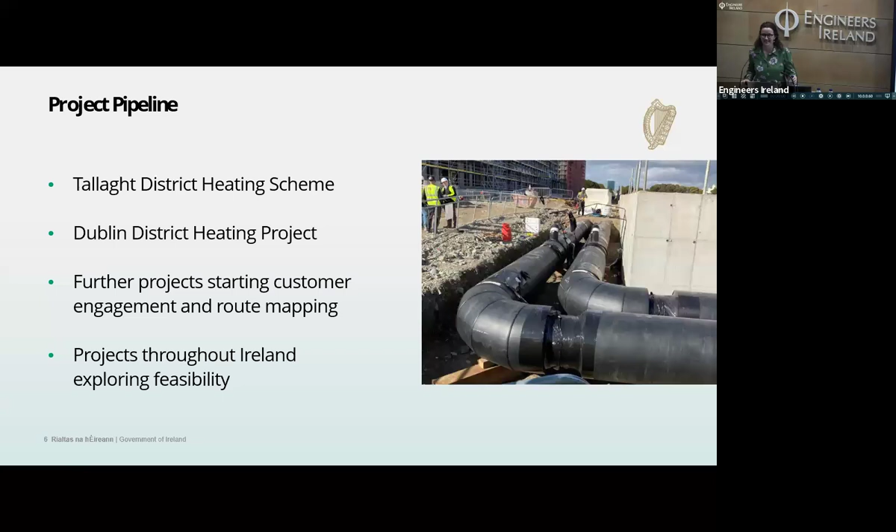Okay, so I'm going to just cover a bit of, first of all, who SEAI is. I'll present some high-level figures on heat stats and data and insights that we have from our Energy in Ireland report. I'll also give an overview of district heating and the Centre of Excellence, as well as a project case study. So for those of you who aren't familiar, SEAI is the Sustainable Energy Authority of Ireland.

Our mission there is to be at the core of delivering Ireland's energy revolution. And we do this really by providing insights to policymakers and programme designers through research and demonstration, technology expertise, statistics and modelling, consumer behaviour and policy advisory, and we feed that insight into the design of our supports to accelerate action in home and business decarbonisation, but also community activation and public sector leadership. And then we feed the insights and the evaluation back into our policies. So it's quite circular.

Every year we publish the Energy in Ireland report, and it's a very comprehensive assessment of where we're using energy in Ireland. So the data in the 2024 report analysed the 2023 data. So I'm going to present a bit of information from the heat section on this, just to give you an idea where we're at really with heat.

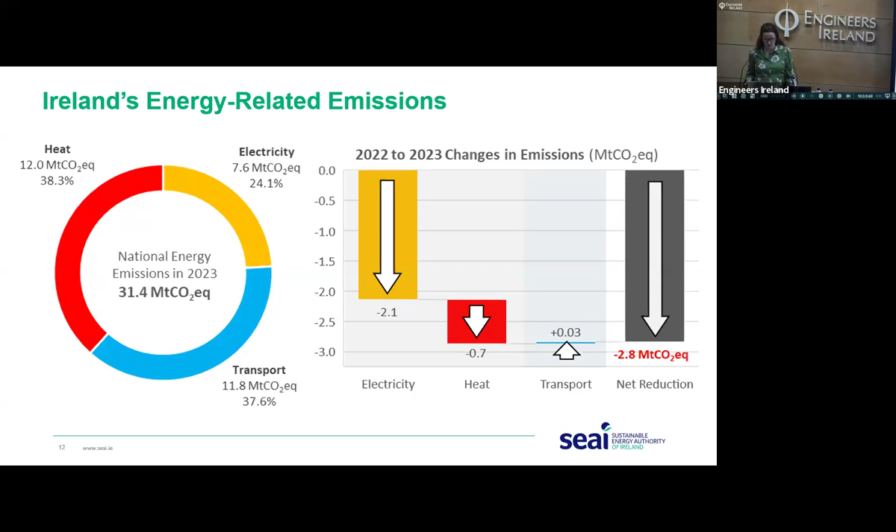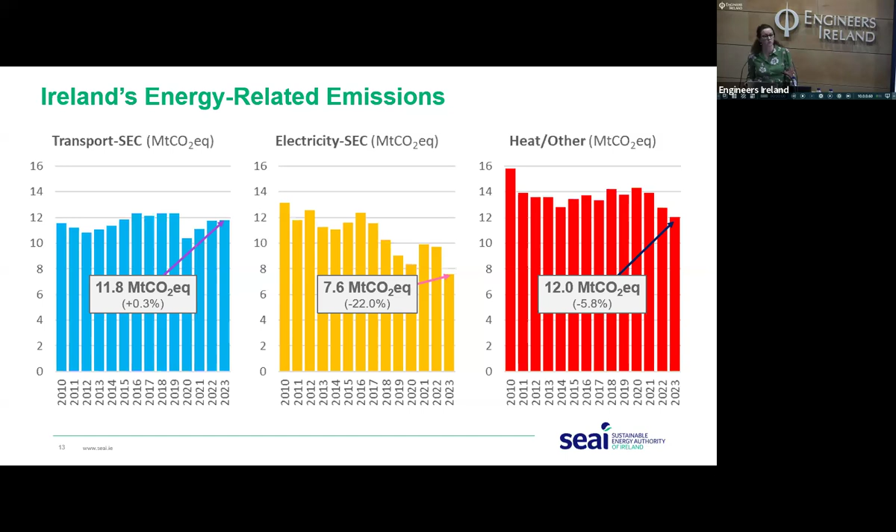There's likely to be a few moving parts on this. It could be to do with higher energy costs, but also slightly warmer winters over the last few years, and there's a whole host of other things that could impact on that. I suppose the key message though is that we're just not coming down fast enough.

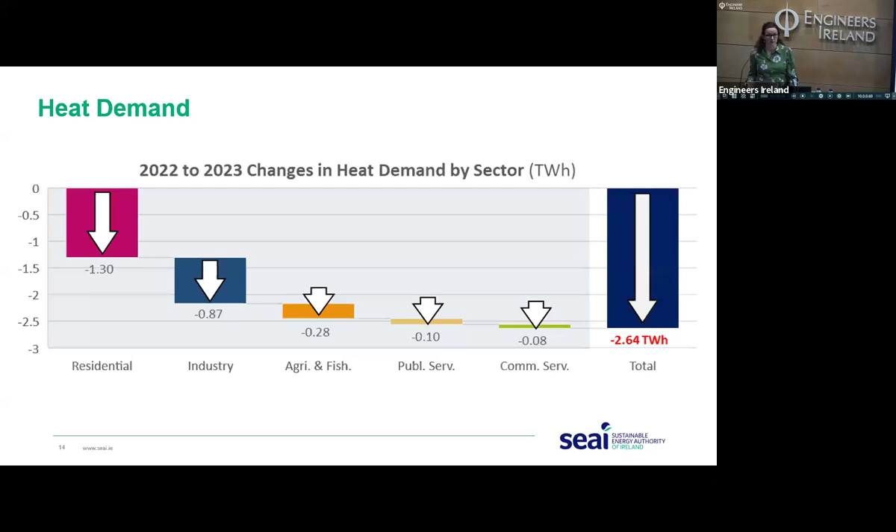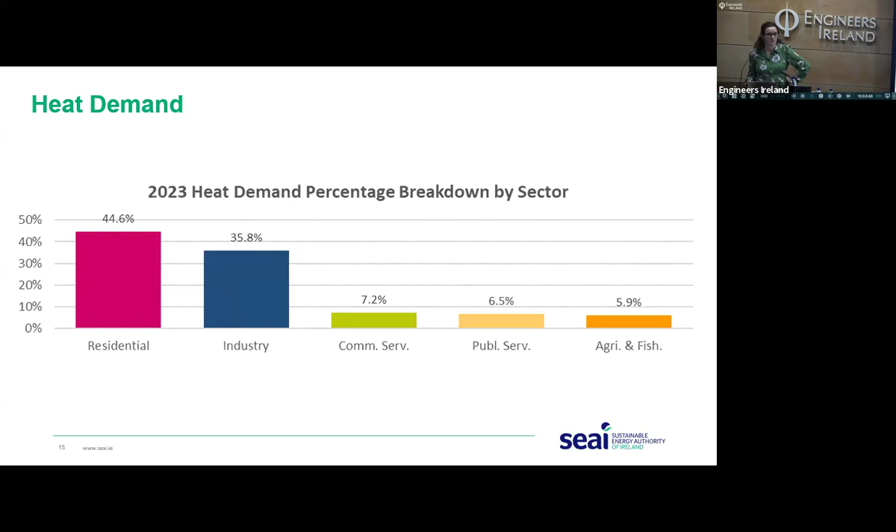This presents the heat demand by sector, where the big reductions were, and you can see residential and industry came down fairly significantly. But across all sectors of society, our heat demand was reduced. Looking at the sectoral breakdown, the residential sector accounted for nearly 45%, and combined residential and industry was just over 80%. Those other three sectors are pretty minimal in comparison.

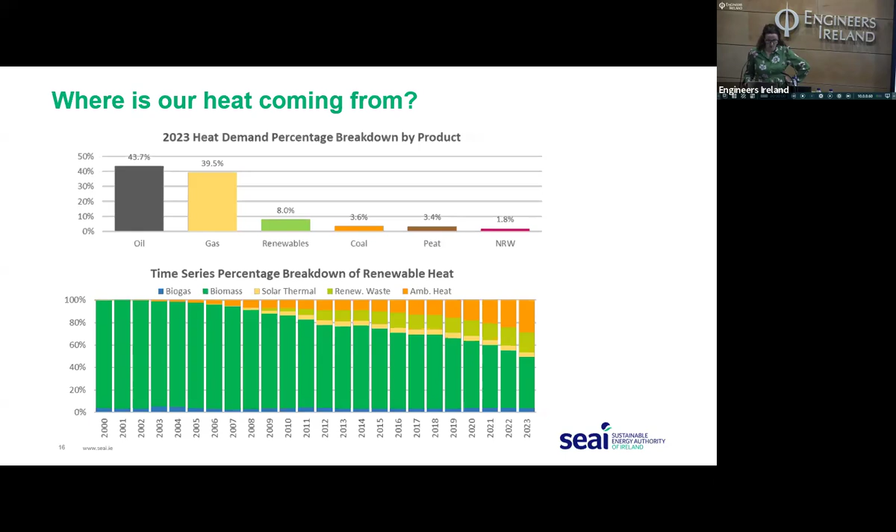But over the last 10 years in particular, we have started to add other more diverse sources of renewable heat to the sector. So particularly there, ambient heat has been increasing, and that's really just from the installation of heat pumps, but also biogas, solar thermal and renewable waste have been added as well.

So where do we stand versus the EU? Well, in the context of the European Union, we currently have the lowest share of renewable energy sources in heat compared to the EU average of 26%. So under RED III, the Renewable Energy Directive, which Seán mentioned, we're going to have to increase that. There's mandated percentages. I think it's 0.8% for 2021 to 2025 and 1.1% increase for the next 5 years. So we're looking at about 15.8% by 2030. So there's an awful lot of work to do to get where we need to be.

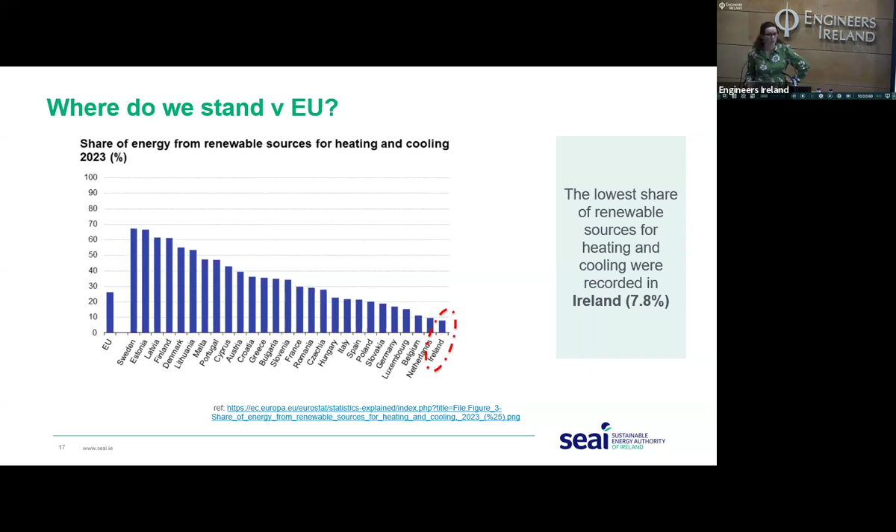In Ireland, it's very low; it's less than 1%. But if you look at the likes of Denmark, it's over 60%. And in some of those leading countries, Sweden, Latvia, and Estonia, it's very, very high as well. So again, a lot of work to do for us to catch up with even the EU average on this.

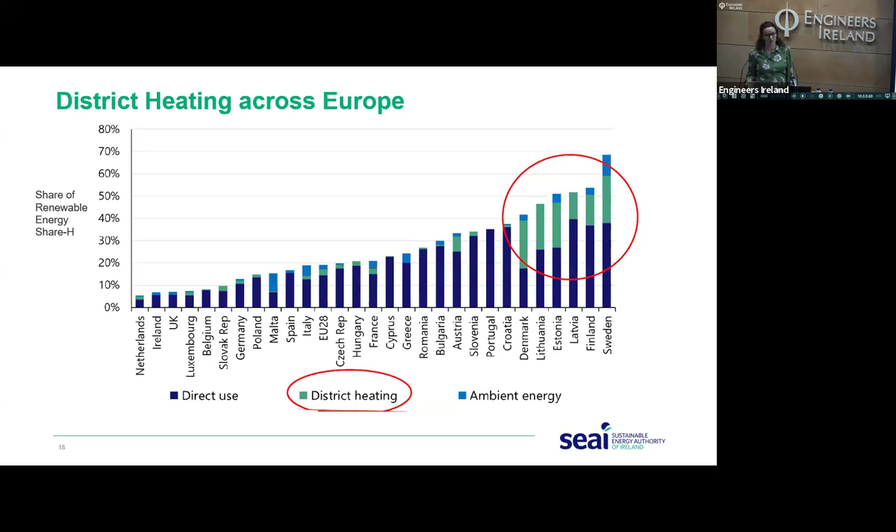So what is district heating? Some of you might know this already, but I think it's worth illustrating. Really what district heating or district cooling means is the distribution of thermal energy in the form of steam, hot water, or chilled liquids from a central source of production through a network to multiple dwellings, buildings, or sites for the use of space or process heating or cooling.

So you take that waste heat to your energy centre, and you can boost that with a heat pump. You can have alternative sources of energy, for example, biomass boilers or electric boilers, and then you distribute that out throughout your heat users. And typically you would have some large anchor heat users, for example, public buildings, but also residential, industry, commercial, that kind of thing.

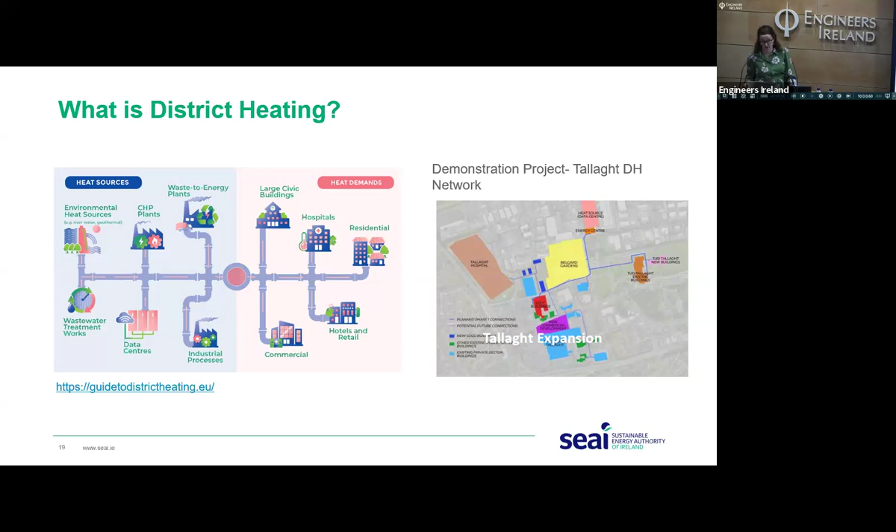So why would you go with district heating anyway? Well, cutting carbon emissions to align with your net zero goals is a priority for Ireland. We have the low carbon bill, and you can do that with district heating because it's a renewable source of heating. It's technology agnostic, and the energy centre can be future proofed. You can switch out future technologies in time.

It supports a future low carbon electricity grid via heat storage and demand diversity. There's also improved air quality and maintenance costs for customers. So each customer doesn't necessarily need a boiler or a heat pump in their homes. They have a heat interface unit, so it significantly reduces maintenance costs for them.

It's a potentially new market, so there is an employment creation opportunity there. Obviously, there's significant challenges with the amount of infrastructure that needs to be built in Ireland, but these are opportunities that we can grasp, really. There's also reduced dependency on fossil fuels and increased security of supply because you're utilising renewables, and also health and safety benefits, for example, removing gas from someone's house. And then finally, there's the potential for low cost of renewable or waste heat where that's reused.

So Seán again mentioned the National Heat Study. I won't go into too much detail here. It is available on our website. There's 8 reports if you have a couple of weeks to read through it. It's very interesting. But it did analyse different decarbonisation pathways towards net zero by 2050. And every scenario presented included district heating as a significant, I suppose, support to the decarbonisation of our heat sector.

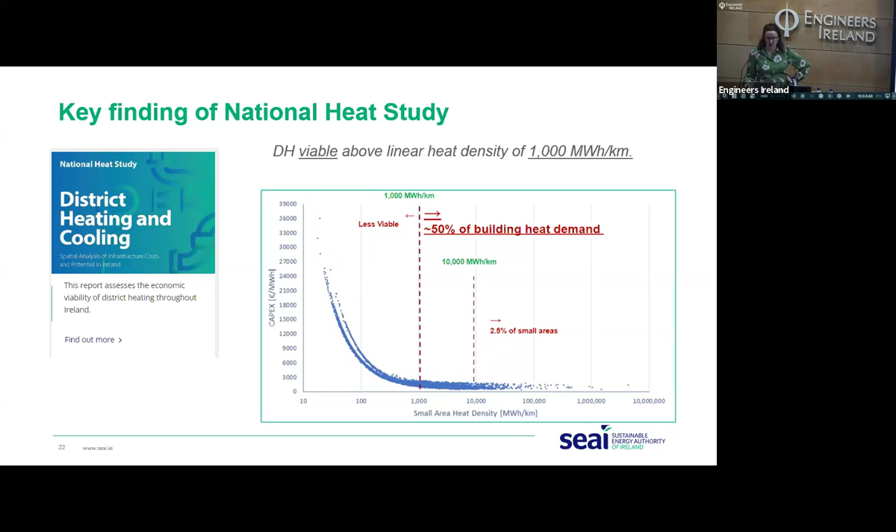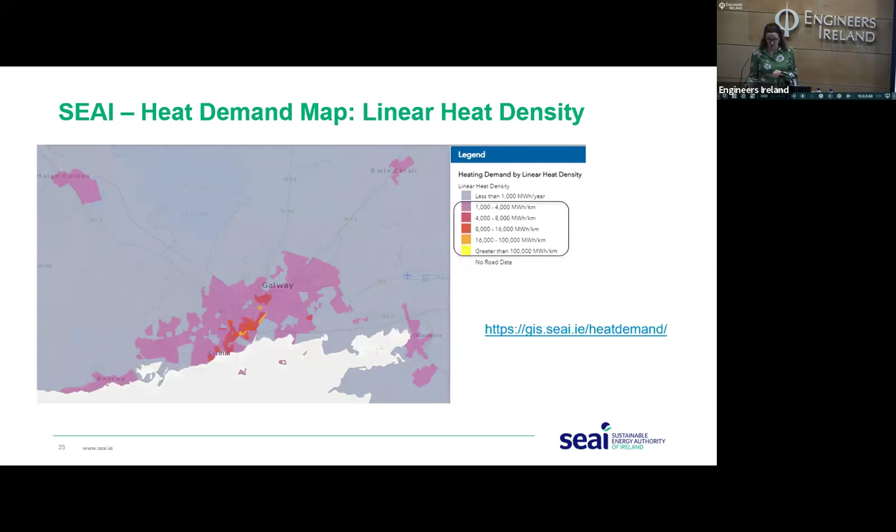So as part of the National Heat Study, we developed a heat demand map. It's available there on our website. The link is there. And it's based on the characteristics of the buildings of each individual area, and includes all the buildings in these areas, including public, commercial, residential, and highlights then where the hotspots are in terms of that density of above 1,000 megawatt hours per kilometre.

We also carried out some further analysis and modelled the towns and cities with the highest potential for developing district heating networks. So this is also on our website, and using a spatial model, clusters of census small areas with high heat demand densities were amalgamated into distinct candidate areas for district heating. So you'll see on this map where the higher the heat demand, it's more yellow, and the lower then it's kind of purpley colour.

And so here are two proposals, say for this area in Waterford City. Based on the knowledge of the heat demand and a desktop analysis, you can identify the big anchor tenants there that you could have with the hospital and university, and then run your pipes into the other more densely populated areas. So there's a few options there, and we use that data to assist with similar planning all around the country, so local authorities can access this to identify areas that could be potentially viable for district heating.

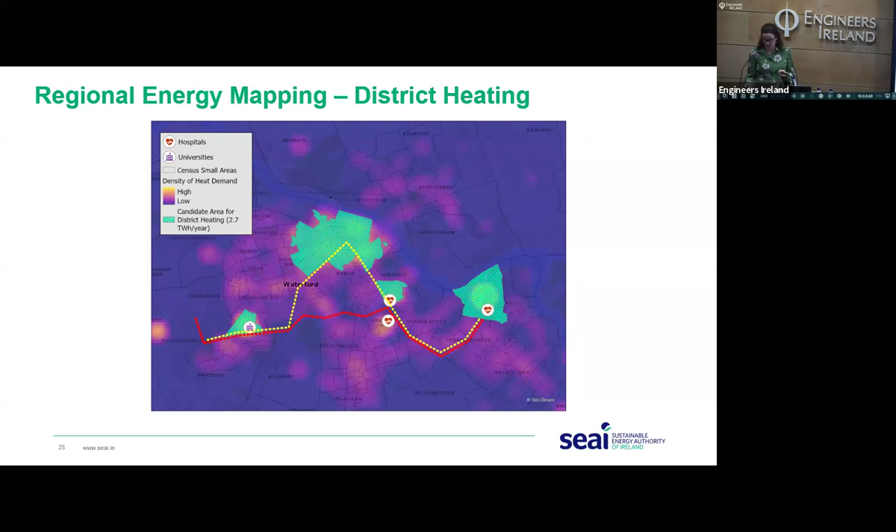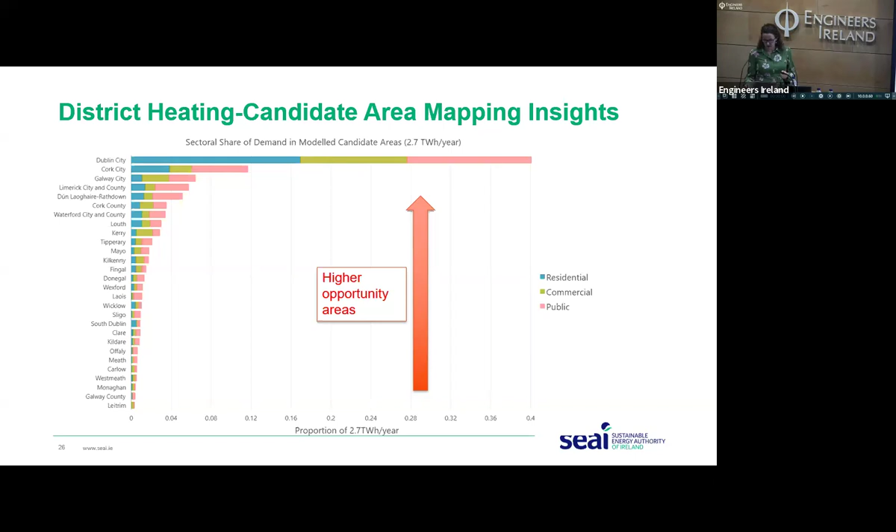So I suppose one of the insights that we got from the candidate area mapping is exactly as you'd expect. The higher opportunity areas are places like Dublin City, Cork City, Galway, but also there's significant public sector heat demand in most of the areas where there's higher density. And these initial district heating schemes will be heavily dependent on these anchor loads.

Looking at the supports for district heat scheme development, obviously we have our national candidate area map, which identified initial areas that were suitable. And then we did further modelling which indicated a large number of areas with potential for district heating. We're also supporting local authorities in pre-feasibility and feasibility assessments. Seán mentioned we're funding that through our Pathfinders grant scheme.

So the District Heating Centre of Excellence was established in January 2024 as a result of the recommendations of the District Heating Steering Group. This is a national centre to provide technical expertise to support capacity building across the sector and to support the development of a national district heat strategy.

So the defined scope of the Centre of Excellence is to coordinate, support and drive the delivery of district heating projects, support DECC in long-term strategy development, also support project sponsors in sourcing funding, which is absolutely key, provide technical support and staff upskilling to local authorities, support raising public awareness, and develop a technology roadmap to 2030.

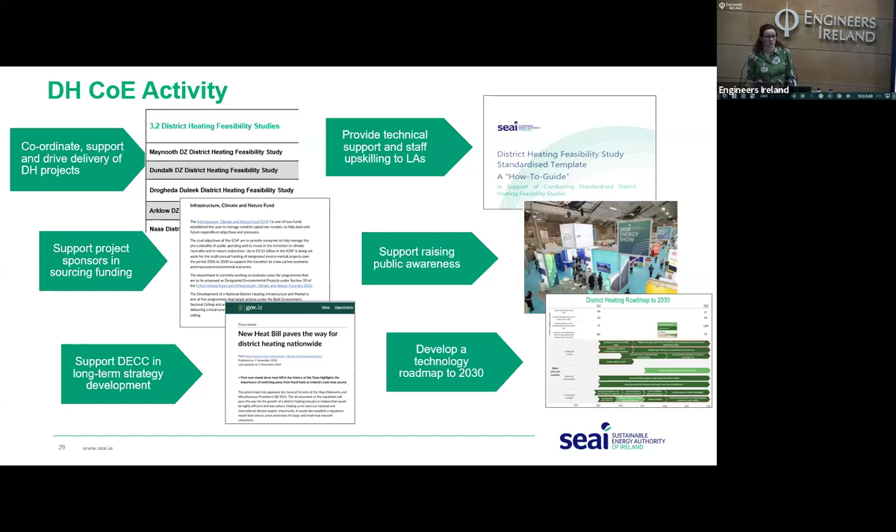So finally, every year we have our energy awards, and in last year's awards the innovative deployment of renewable energy award was won by the Tallaght District Heating Scheme. Well deserved. This scheme reduces emissions in the area by almost 1,500 tons of CO2 per annum. So I'm going to see if this works.

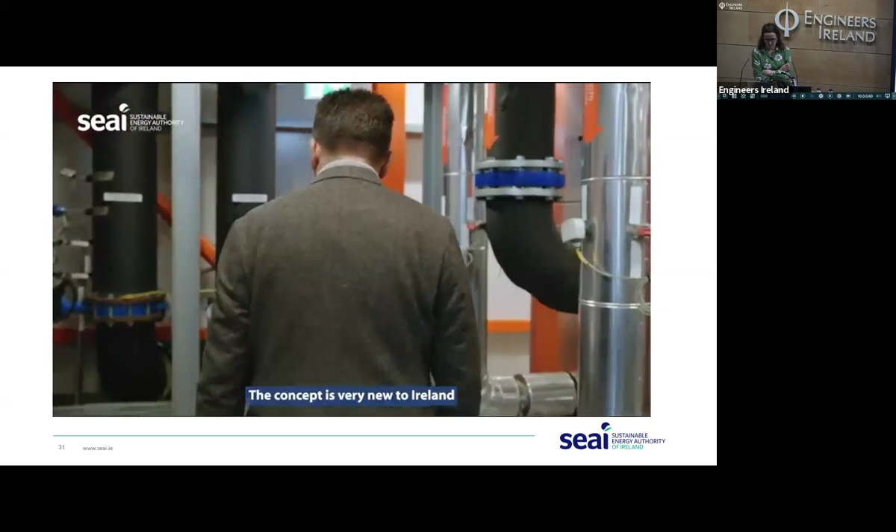The company is limited by guarantee, 100% owned by South Dublin County Council, and is registered as a not-for-profit entity. The concept is very new to Ireland, and the idea is to find a source of heat and use it. In our case, servers are cooled down and that heat goes through the heat collectors in the back of this building and brings the hot water at around 27-28 degrees depending on the outdoor temperatures. And then we increase the temperature to the correct level.

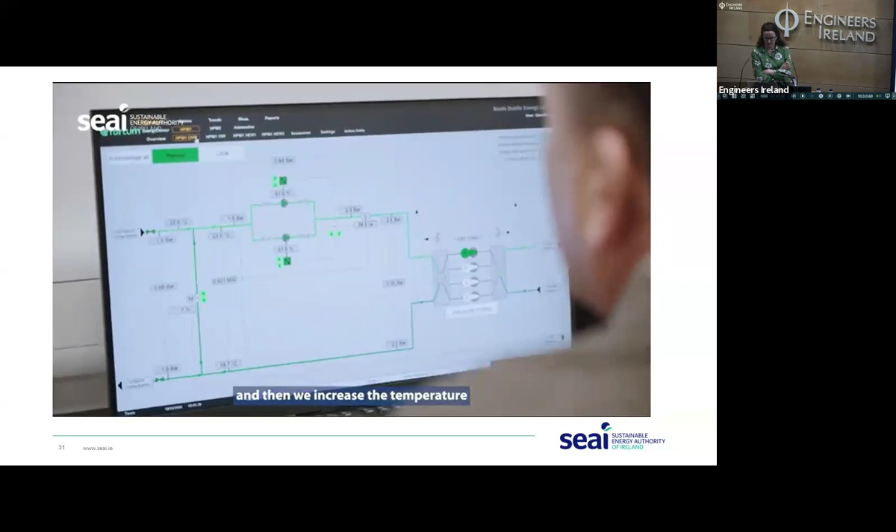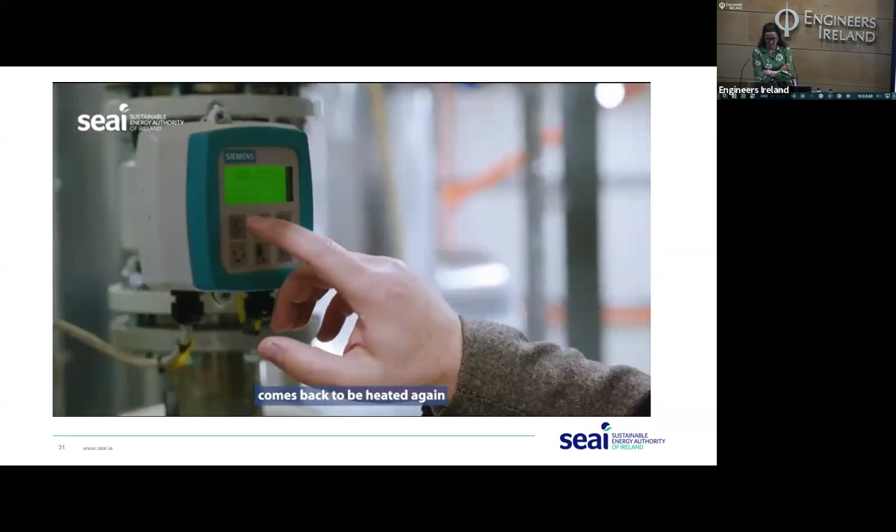The hot water is produced and then through the pipes is transported to the buildings to heat those. After the heat is delivered to the buildings, the temperature drops, and we supply back Amazon with cold water that also reduces their cost as well. So it's benefits for both. And then water comes back to be heated again, and this is a closed circuit.

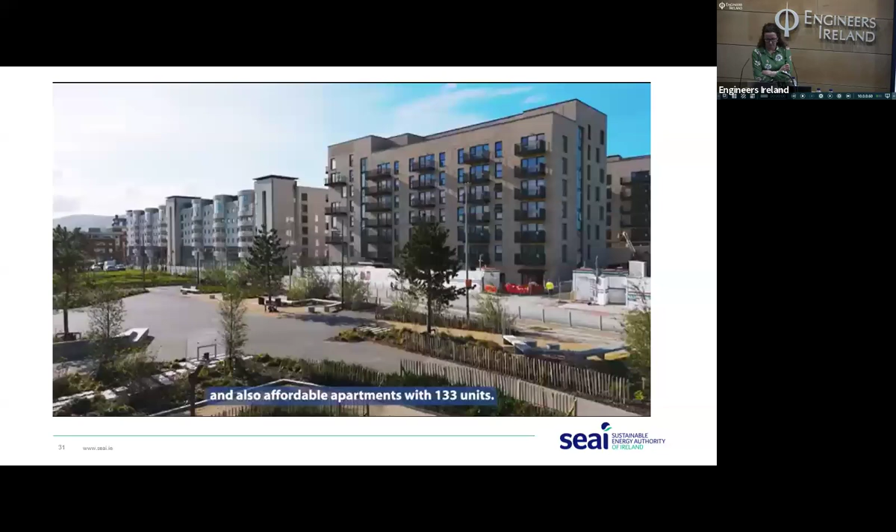We have in total connected 55,000 square meters, connecting the county hall with the library, innovation center, campus, sport building, and also affordable apartments with 133 units. So it's a combination of public and also residential, and we are looking to add more in the future. Education, maybe health and other residential buildings as they come.

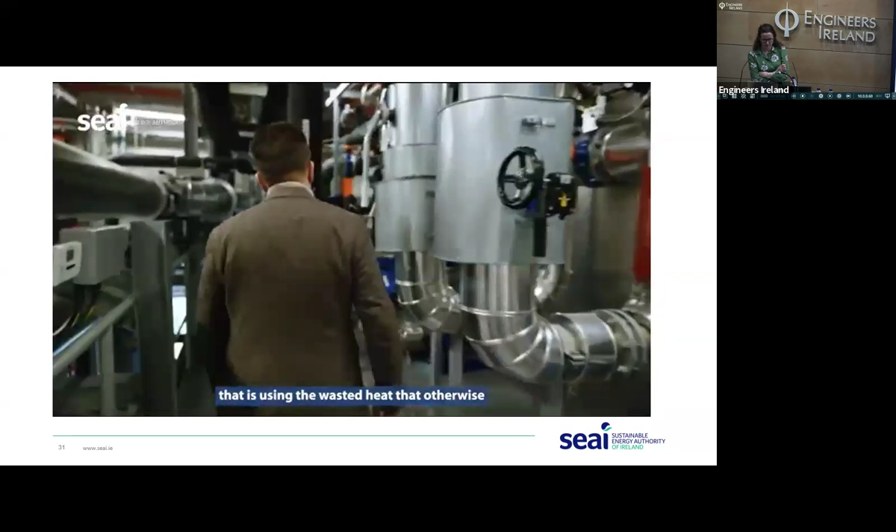This local technology is using heat that otherwise would be released into nature. So it brings down the gas consumption in those buildings otherwise heated by fossil fuels. And it's proven already that people feel served and they can just enjoy the heat that comes from our facility. The close cooperation with the local authority, county hall, contractors, and central government made this project successful.

So if you ever get a chance to visit it, I'd highly recommend it. It's the cleanest energy centre I've ever been in.

So that's it for me. Thanks very much. Do you want to hand over to yourself? Thanks, Dearbhla.